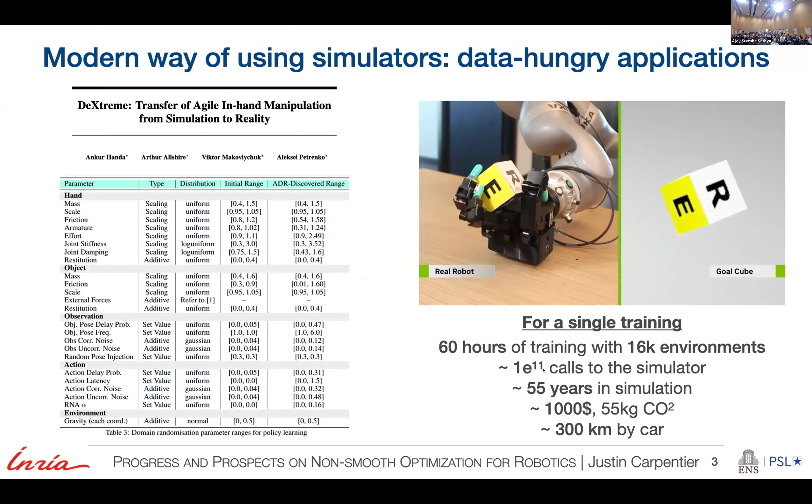Currently simulation is a major source of data production for robotics, mostly, for instance, for RL. This is an example coming from NVIDIA with the DeXtreme paper, where we can see the massive numbers of how we use simulators today to generate many samples. And if we look at

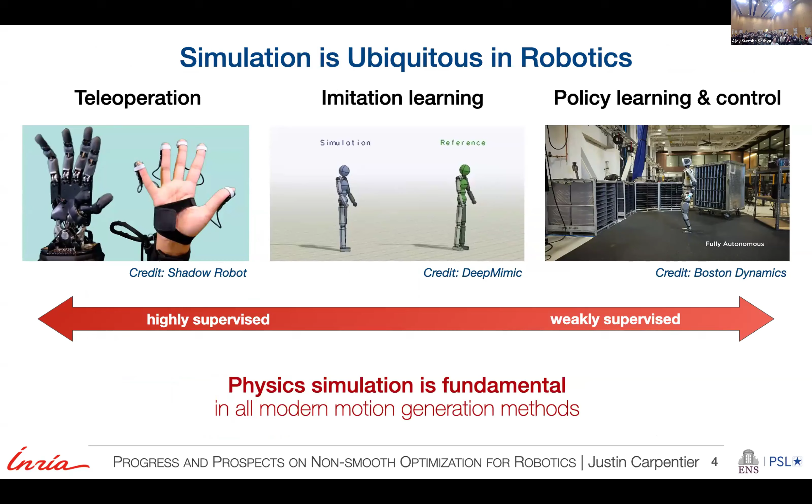robotics in general, simulation is ubiquitous for teleoperation, imitation, and policy learning. So this is a fundamental block. And so the question is that if we can accelerate simulation, then we can still improve all these fields.

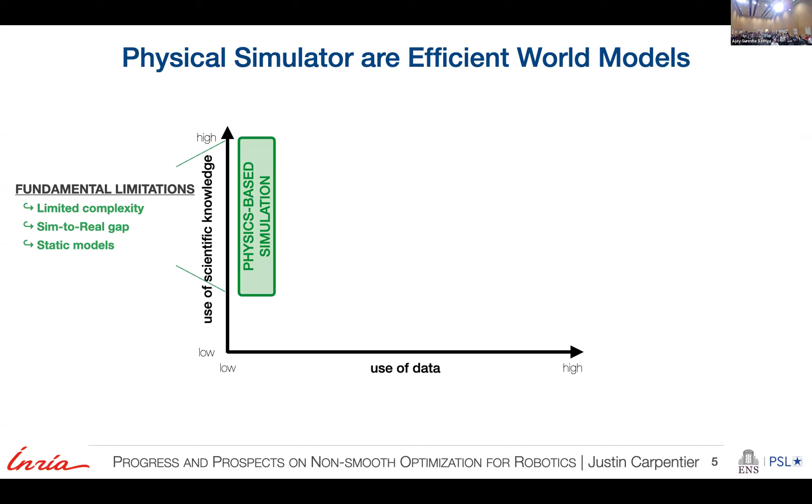In fact, I would say today's physical simulators remain efficient world models. We can divide this world in two parts. On one side, physics-based simulations, using mostly scientific knowledge, which suffer from many limitations that we know, but it's still relevant to use them: limited complexity, sim-to-real gaps, static models.

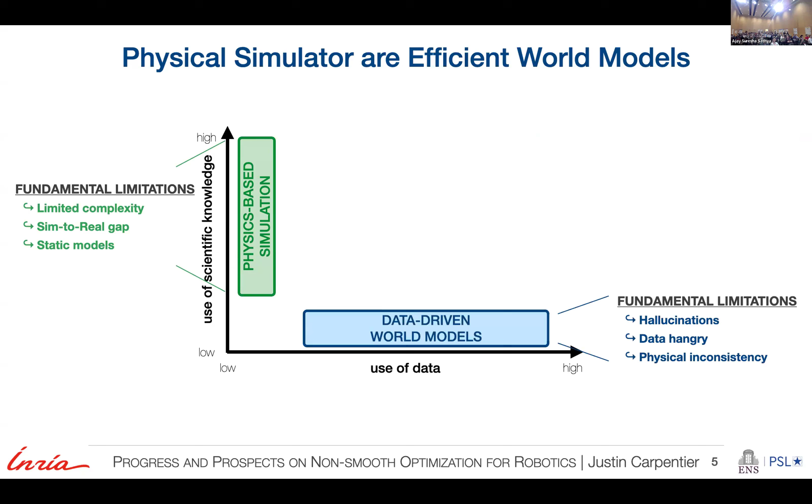And on the other side, today we have this modern era of data-driven world models, which also suffer from many artifacts like hallucination, being data hungry, and physical inconsistency.

There is also a question between CPU-based and GPU-based simulation, but I think both of them are still fine today. If you want to be very fast for model predictive control, CPU-based simulators are still the way to go if you want to do whole body MPC. On the other side, GPU-based are becoming the standard for generating massive amounts of data for RL. Ideally, as a community, we want to build the ideal simulator, which can be both fast and compatible with massive batch computations.

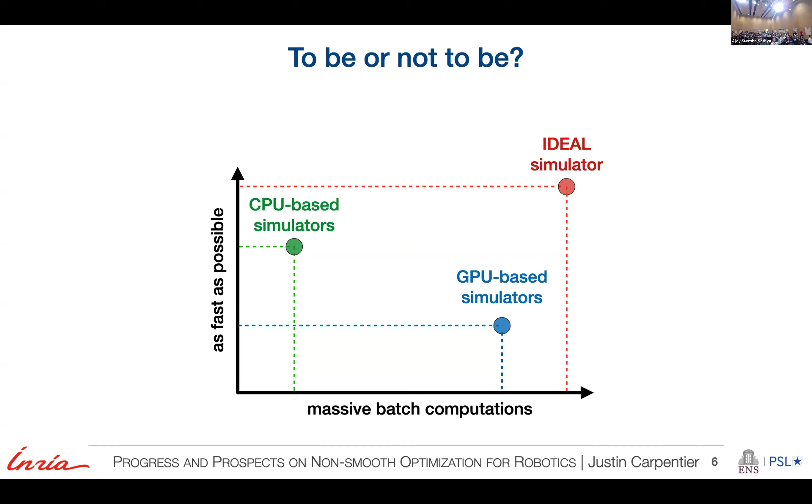Today I will mostly talk about the algorithmic perspective of simulation. It means that we can leverage the solution that we provide on CPU and GPU if you want. And the vision in our team, the Willow team, is that we want to revise physics simulation with modern optimization for scalability, efficiency, robustness, and differentiability.

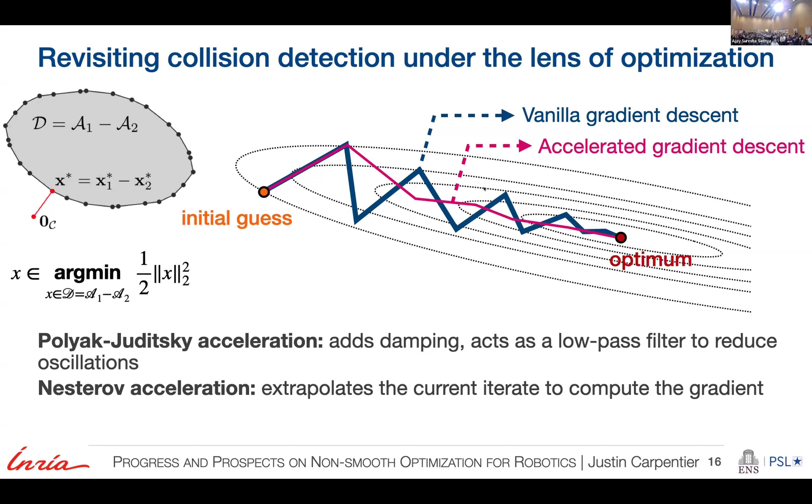And what we have been showing is that we can accelerate it using standard techniques of gradient acceleration. So you have Polyak or Nesterov acceleration techniques, which help you to damp the oscillation phenomena which are traditional for gradient-based optimization methods, to reduce the computational burden of collision detection, and to divide by at most 2 the number of iterations that you need for converging towards the optimal solution. So this is a new accelerated GJK algorithm. Just adding 2 lines here helps you to go quicker towards the optimal solution.

And so really, the key of our approach has been to reformulate GJK as an optimization-based framework using the Frank-Wolfe setting, and then to accelerate it using the classic Nesterov and Polyak acceleration schemes. And you just need to change 2 lines of code in your existing implementation of GJK if you want to benefit from this advantage. So it's nothing in terms of implementation.

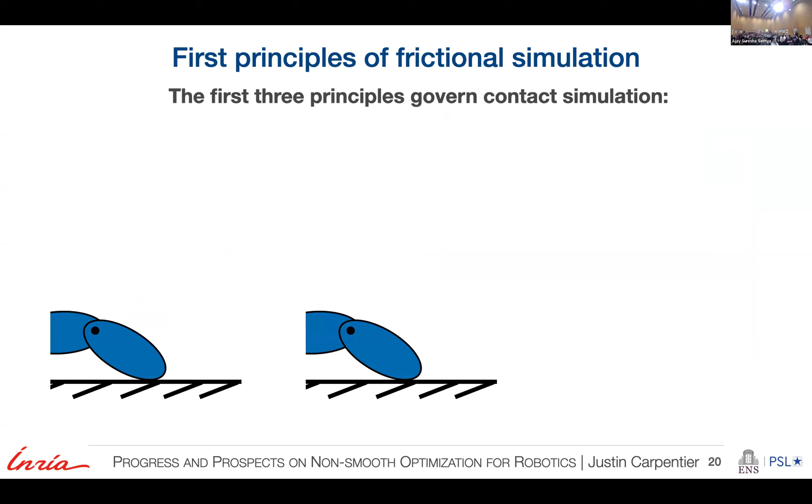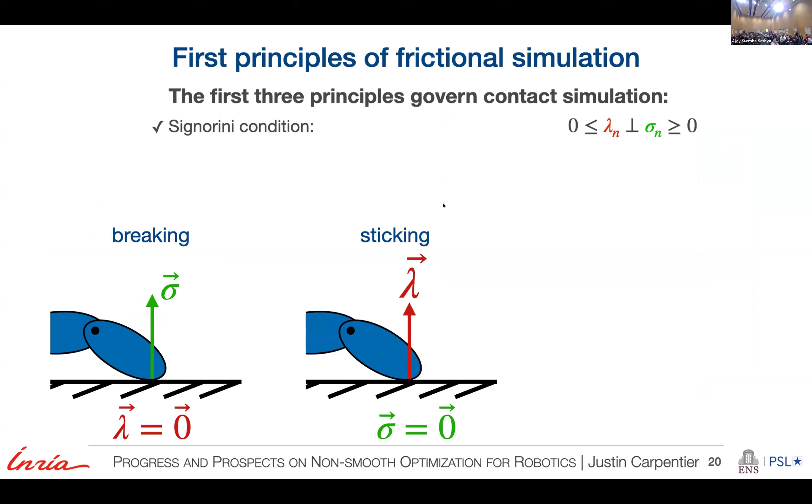Now I will move towards collision resolution. So collision resolution is also a big part of simulators. And when you speak about contact simulation, you need to handle 3 main laws. The first one is the so-called Signorini condition that tells that the normal forces and normal velocities are both positive, but they are complementary, so they cannot be non-zero at the same time. We have also the Coulomb friction constraint that says that lambda is bounded by the cone, so it means that the tangential forces are bounded by the normal forces.

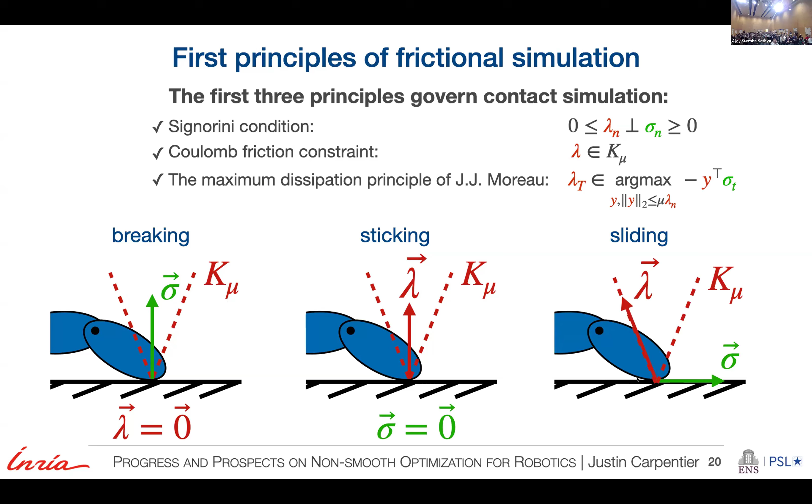And the third one, which is called the maximum dissipation principle by Jean-Jacques Moreau, tells you that when you start to slide, you start to dissipate energy, which maximizes dissipation in the tangent plane of your contact points.

Okay, now these three modes can be encompassed by what we call a non-linear complementarity problem, or this form, where on one side you have a lambda, which belongs to a friction cone, and sigma plus the corrective term, which belongs to the dual of the friction cone. So this term is called the De Saxcé term, which is just a shift to write the NCP as a conic complementarity problem.

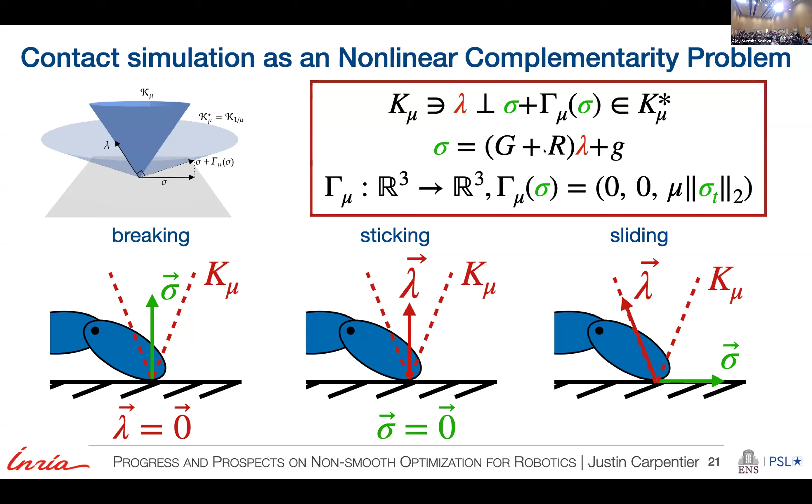And you have a relation between the contact velocity, point velocity, and the contact forces. So G is the so-called Delassus matrix. R is a compliance matrix, which can be also a proximal term, and g is a free velocity of the contact.

The first thing that we did during the PhD of Quentin Le Lidec here has been to just observe the current state-of-the-art methods for solving contacts in robotics. And we cover all the standard approaches, and we show advantages and drawbacks of all of these formulations. And so the key observation from this analysis has been that modern simulators tend to drastically simplify or relax physics at the price of some physical consistency and accuracy, which can then perturb the learning of control policy if you use RL, for instance.

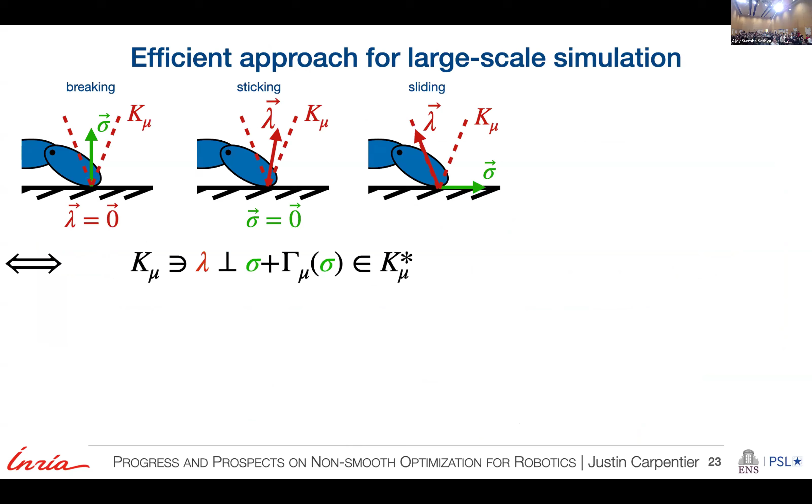So the first thing that we have been working on has been new methods to properly solve the NCP problem of contact. So the idea is that we will be working with the NCP problem directly, and what we have been showing is that we can use this kind of interleaved problem where you will try to solve for lambda, which is a conic problem over the contact forces. And you have also sigma, which only depends on lambda as a linear constraint, but sigma is also appearing here in the De Saxcé term.

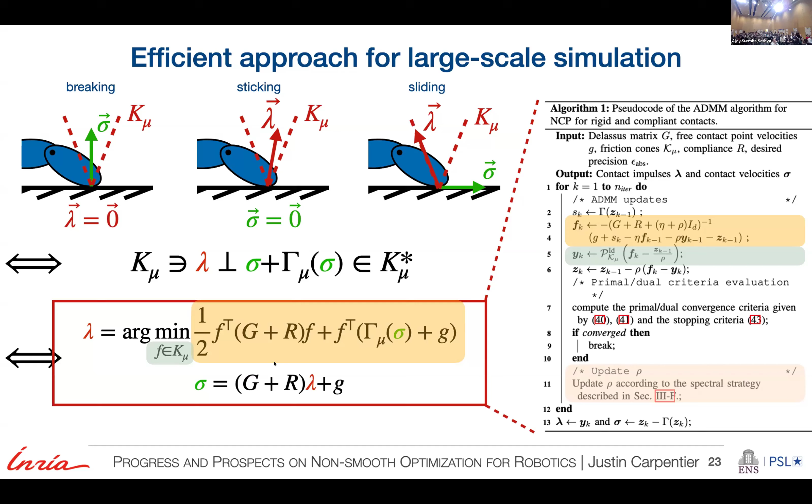So we provide what we call a proximal ADMM technique and a spectral one. I will try to explain what it means, but the idea is that it's a splitting method which is able to properly solve this kind of problem. The idea is that we want to be very robust in terms of problem conditioning and have fast convergence. And what we propose is the spectral rule to update the step size used in ADMM, which depends on the conditioning number of the Delassus matrix.

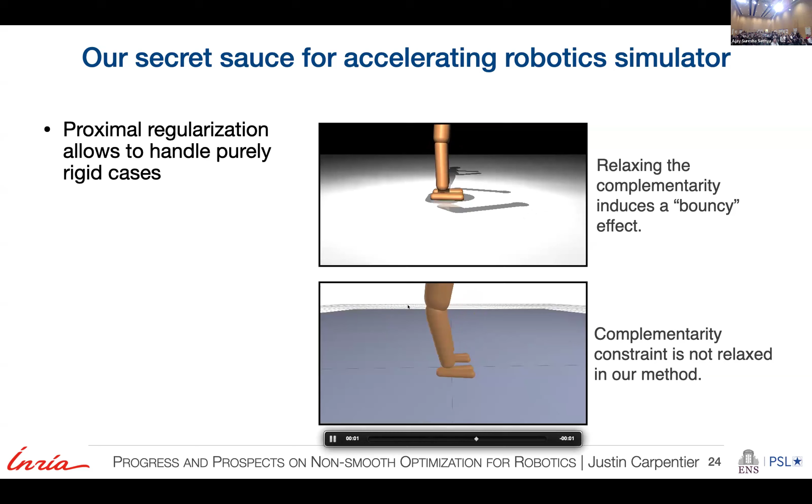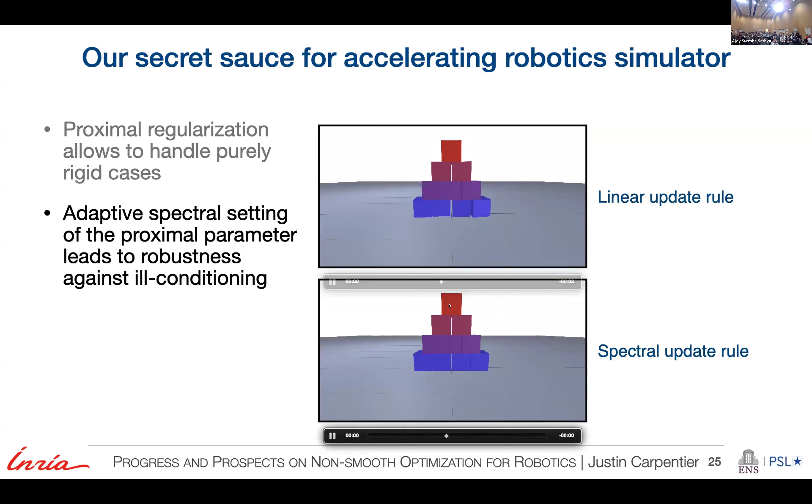So the secret sauce behind this has been to use proximal optimization to be able to address purely rigid contact beyond soft contact modeling, and also using the spectral rule to really be able to account for bad conditioning. So here you have cubes, gigaton-weight cubes, and microgram cubes. If you use the standard linear update rule of ADMM, you won't be able to converge towards a precise solution. But if you use a spectral solution which depends on the conditioning, you are able to converge towards a very stable solution. So this is the technique. I won't cover it, but everything is referenced in the original work.

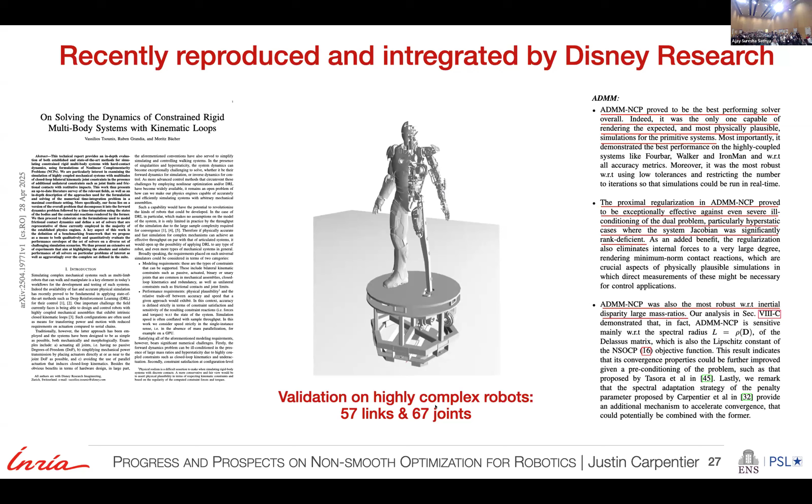Just to say that this has been recently reproduced and integrated by Disney Research in the Kamino solver. And they acknowledge very strong benefits of our ADMM NCP solver compared to the other solutions. They did that on a large set of dynamical systems like these ones, mostly on very complex ones with a high number of closed loops, like 57 links and 67 joints, which is much more than what we have currently on humanoids. And this Kamino using our solver techniques has been highlighted during the keynote of Jensen at NVIDIA GTC.

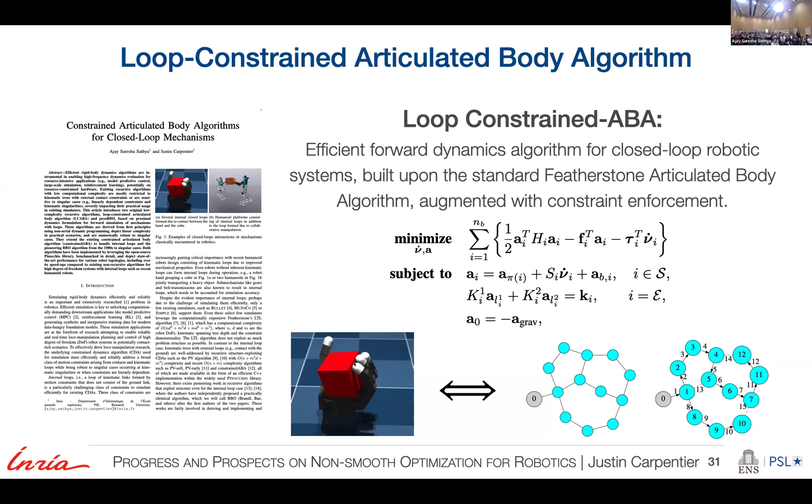We provide augmented algorithm settings to properly exploit these coupling terms and use factor graphs to try to better exploit the sparsity induced by the graph of constraints, because as soon as you start to have many contact points, you start to have coupling, and now it's a question of constraints. Everything will be presented tomorrow, and the progress again is to go from a cubic complexity to a linear complexity, which might help simulators to scale for very large scenes. During this week, Ajay will present the poster associated with this paper.

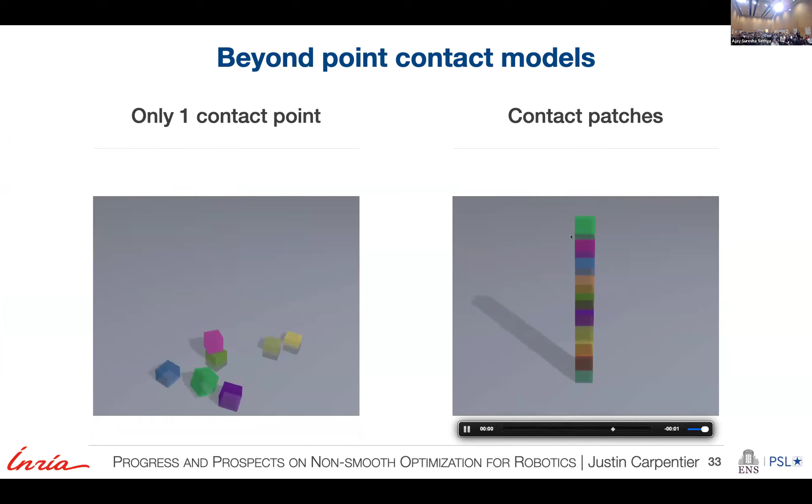Okay. Another thought that we had in the team is to go from point contact modeling to surface contact modeling, what we call contact patches. And when you have contact patches, it behaves much better. The idea is that if you have a contact point, you have the Signorini condition that we have seen before. When you start to work with surfaces, it's a positive distribution of pressure field and a positive distribution of contact velocities for all the points belonging to the contact patch.

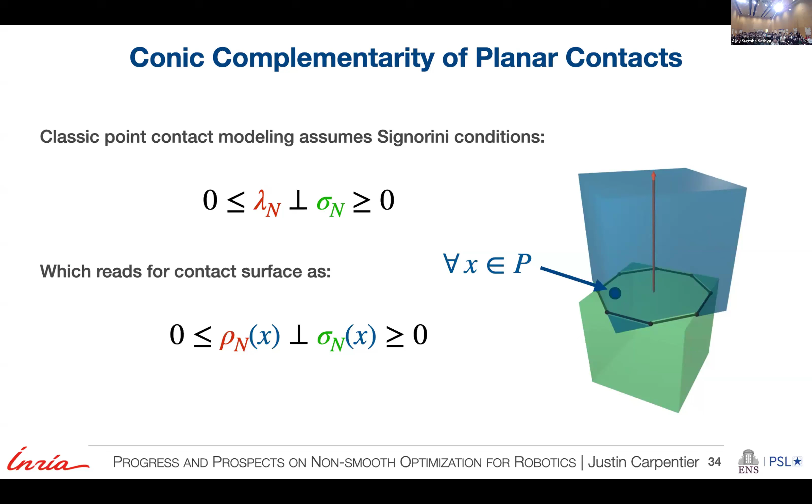A nice idea developed by Yann de Montmarin, who is here today, is to prove that we can write it as a nonlinear complementarity problem again, of this form, which couples torsional moments and contact normal forces to torsional angular velocities and normal velocities as a complementarity problem. And this extends the classic stability conditions that we know in robotics for humanoid robots, which go beyond the classic zero moment point conditions over the contact surface. So I invite you to look at the poster session.

Another question is how to invert the physics, now that we know how to model contacts with the NCP formulation. We recently came to this new frictional contact implicit inverse dynamics formulation. The idea is that you plug your contact model and your robot dynamics as a constraint of quadratic programming formulations, so it's no longer a QP. You also want to have control limits, and you want the objective to just encode the task objective or task reward. Everything is detailed here, but we have provided two formulations, one splitting ADMM-based formulation, and the other an augmented Lagrangian formulation that properly embrace these settings.

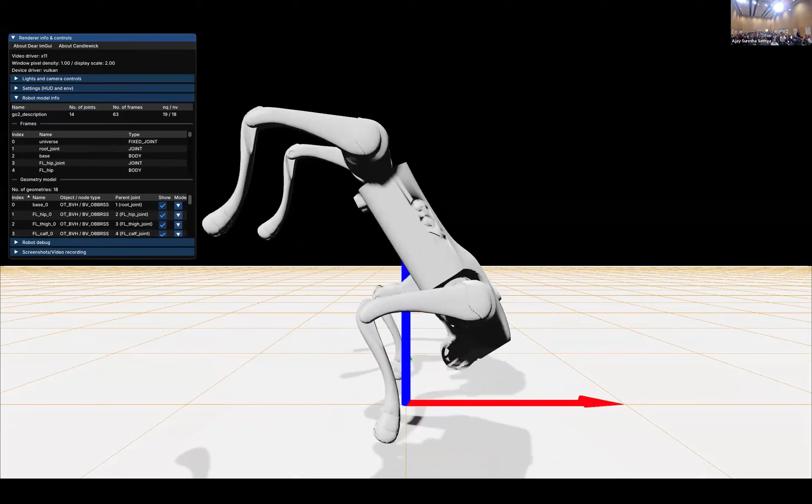Here it's just purely inverse dynamics, so no time horizon, it's just pure reflex, but we are able to generate very, very agile motion on the robots. So this is a promise for the future, I would say, in the sense that we could be able to generate very active motion on the robot if we now have preview on this kind of point. Okay, and today, I think Pierre has a poster on this topic.

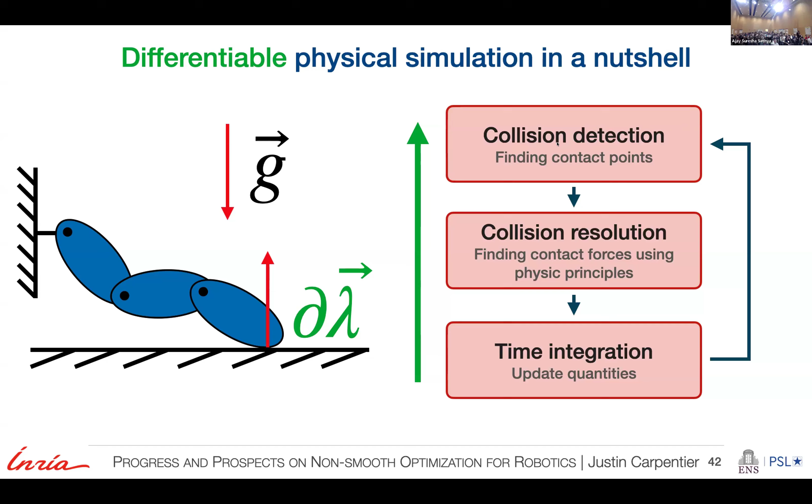I wanted to discuss differentiable simulation for robotics. We have been working a lot on this topic. It's still an open problem for us. The idea is that we want to differentiate the whole pipeline of computations, meaning not only differentiating collision resolution, but also collision detection, and also to provide automatic reasoning about creating and breaking contacts.

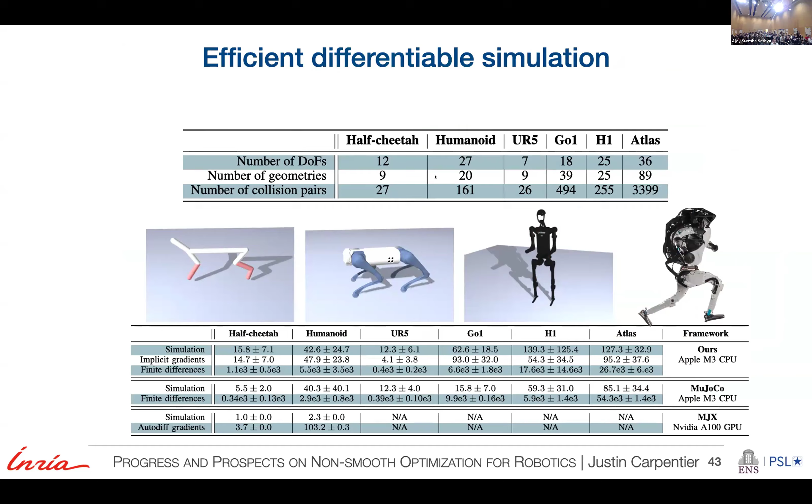I won't cover it for lack of time, but in the first try that we made, we have a solution which is able to run very fast. If you need around 100 microseconds to solve the simulation problem on the Atlas robot here with many bodies, we have shown that we can get the derivative of this problem for less. So if you double the price of simulation, you can get both the simulation and the derivatives. It's a nice promise for the future to leverage derivatives for learning and control in general.

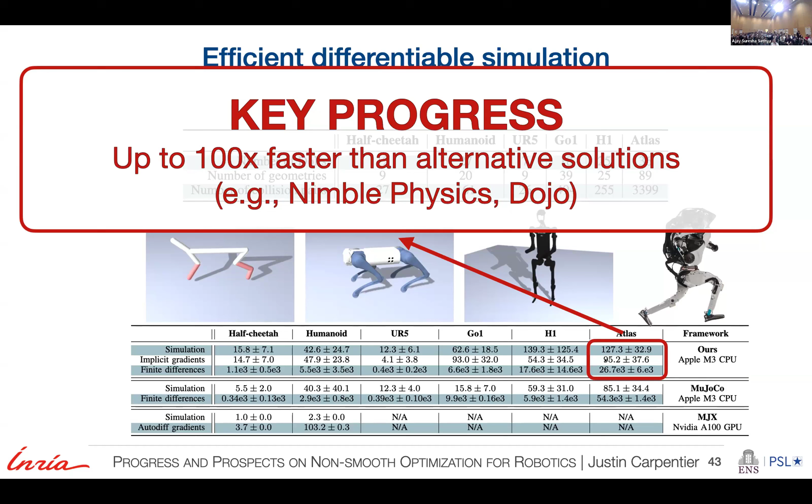Okay, so the last topic of today is still related to the non-smooth aspect, but the idea is to work on scaling self-supervised goal-conditioned RL using the framework of survival analysis. Goal-conditioned RL is an increasingly popular setting in robotics. You go from a policy which is just conditioned on the current state, but now you condition it also with respect to the goal that you want to reach. And in fact, we have to optimize a very uninformative sparse reward, which says that you have 0 only if you reach the goal and -1 if not.

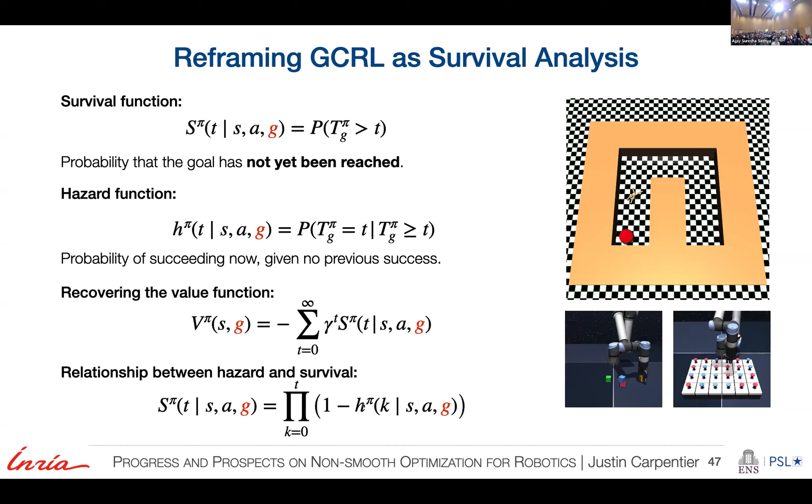From this perspective, we can recover directly a probability distribution over the value functions, which is directly related to the survival functions. And we have a link between the survival functions and the hazard function through this formula, which is also very tractable. So the idea now is that if we know how to compute this one, we know how to solve the problem.

So the thing that we need to learn is this hazard model, H theta of pi, H being a neural network conditioned on the current state, action, and goal. And we can use likelihood maximization, so just supervised learning, by taking into account two labels: successful trajectories, where the time for reaching the goal is given by the algorithm that found a solution, or, if we don't solve the problem, censored observations, which also give us information that the problem is not solvable in this given horizon.

The key advantage of this formulation is that it properly exploits successful and failed trajectories. It's not a Bellman formulation, with all the details that we can encounter with Bellman formulations. It's a natural and logical treatment of sparse rewards, and we can also predict uncertainty over time-to-go. So by framing everything using the survival analysis framework, we have been able to really scale RL much further beyond what has been used so far, like CRL, contrastive reinforcement learning.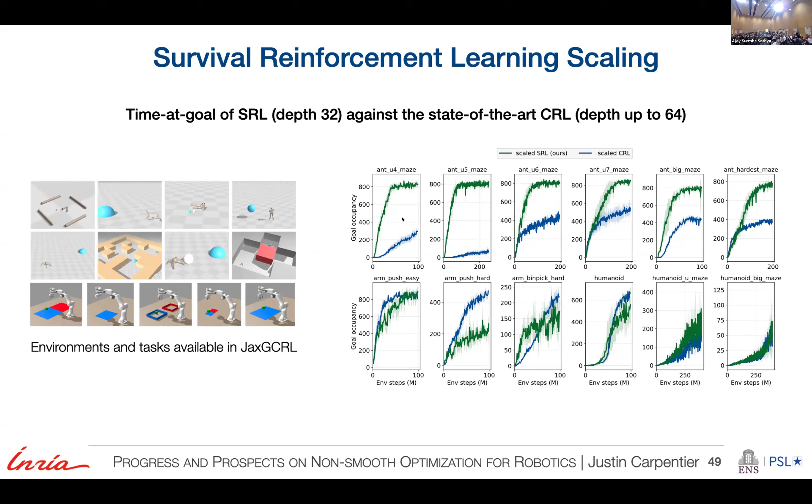Scaling CRL is a paper released last year, which was able to enlarge the set of solvable problems, and we go even better, from 2 to 8 times higher performance. As the planning horizon grows, we have also been able to show that our approach scales with the dimension of the problem, unlike CRL. If you want information about that, you can discuss during this week with Frankie, Fabian, and Theo.

Last, to finish my talk, I want to promote open source in the current world. For us, open source is a catalyst. It helps us maintain knowledge in the team, but also distribute our knowledge towards other teams and real-world applications. The philosophy we are trying to follow is more with less, trying to reduce the computational burden of simulation and optimization in general, to be able to run things on edge devices. We want to have less code, compute, data, and bugs in general.

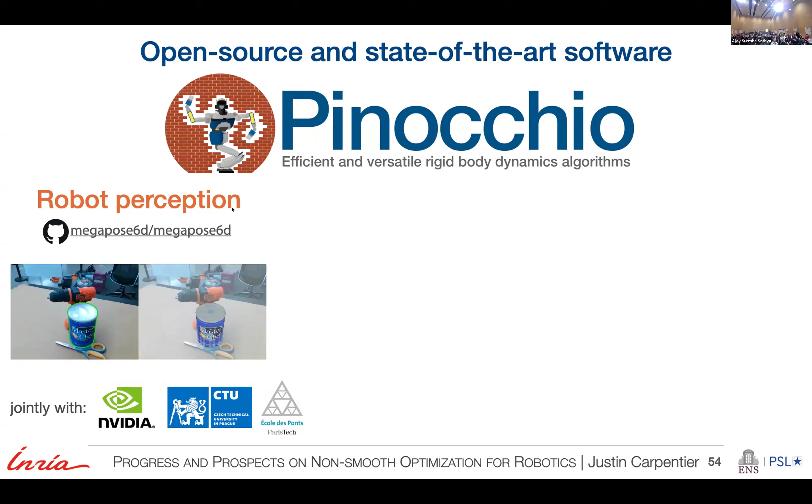The most famous framework, already mentioned by Ajay, is Pinocchio. More than 10 years of development, and nowadays it's really teamwork, and we are providing Pinocchio 4 now with all the frictional solvers that we have been discussing before. We have been working a lot on robot perception, and we want to continue on this aspect. Today there will be people talking about this topic, I think.

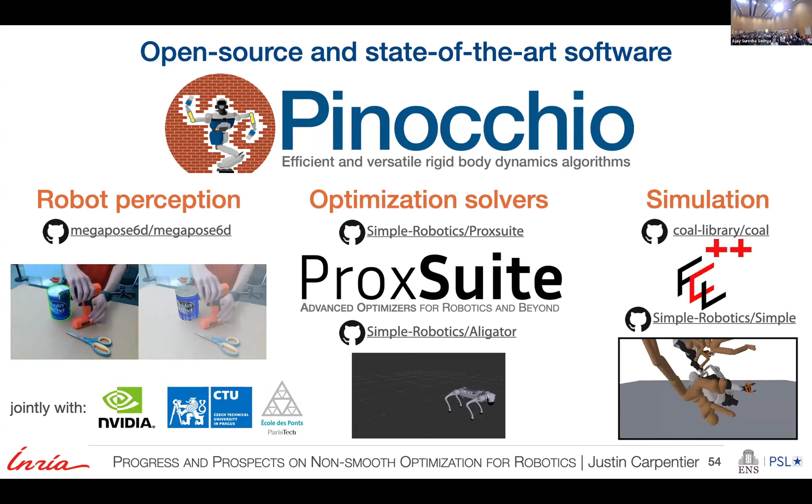About optimization, we have started working on dedicated solvers for robotics, both for generic optimization like QP solvers and differentiability over QP solvers, and also for nonlinear MPC. And finally, simulation: we have Simple and Pinocchio that you can use and leverage to really be able to build your own simulation pipeline.